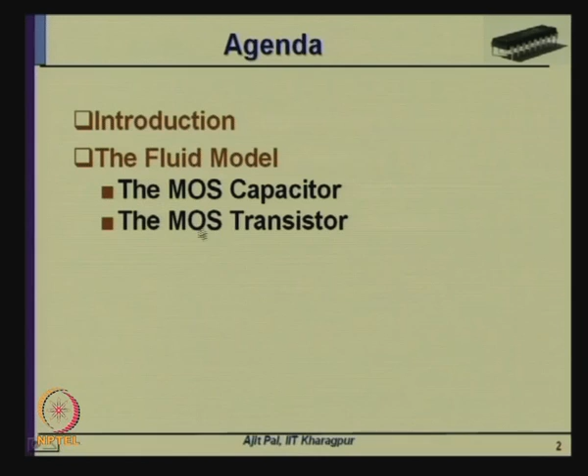Here is the agenda of today's lecture. First, I shall give a brief introduction about what I discussed in my previous lectures for continuity. Then I shall discuss the fluid model, which has been found very useful in understanding the operation of MOS transistors. As part of the fluid model, I shall consider the operation of a MOS capacitor, the most elementary building block of MOS transistors. Then I shall discuss the operation of MOS transistor based on the fluid model, and after that the characteristics of MOS transistor without going into any mathematical expression or analytical analysis, simply based on the fluid model. After that, the various modes of operation of MOS transistors will be discussed, followed by regions of operation—there will be 3 regions of operation of a MOS transistor—and finally, highlighting some important parameters which affect the operation of a MOS transistor.

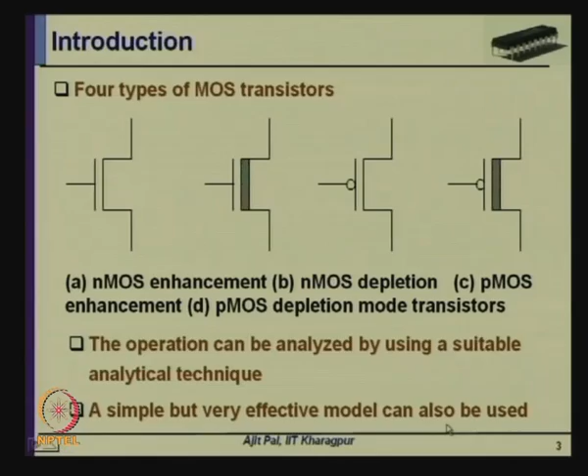This is somewhat similar to whenever we build a building, bridge, or campus—we make a model essentially to visualize the overall layout, structure, or basic functionalities of the system. This can be very nicely done with the help of a simple but effective fluid model, which can visualize the operation of charge control devices—devices like BBDs, bucket brigade devices, CCDs, charge coupled devices—and MOS transistors are one of them. MOS transistors are essentially charge control devices, and their operation can be nicely explained without going into detailed semiconductor physics with the help of this fluid model. You will see that the operation of MOS transistors can be understood even by a novice.

So what is this fluid model? This fluid model I shall be using is based on 2 very simple ideas. First, electrical charge is considered as fluid which can move from one place to another depending on the difference in their level, just like a fluid. As we know, whenever we have fluid in a container, and we connect it to another container, it will move from one to another depending on the difference in level. Similarly, charge will move from one place to another whenever there is a potential difference between the two. So electrical charge can be considered as fluid, and its behavior will be very similar to fluid—the way fluid like water, oil, and various types of fluid behave, as we see in our real world.

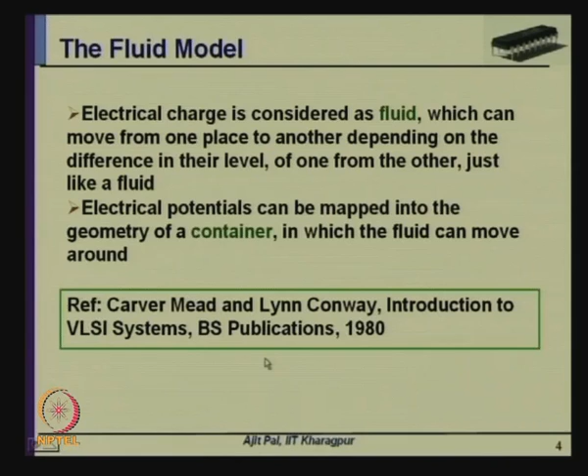Let me draw it for your convenience, a MOS capacitor. So, what we have seen when we fabricate MOS devices, we start with a wafer. This is the wafer, and then we fabricate - we put silicon dioxide on top of that. So this is the silicon dioxide, and on top of that we put polysilicon. We can represent it by a hatched area. This is the polysilicon, this is silicon dioxide, and this is your substrate, or you can say p-type substrate. It can be n-type as well, it does not matter.

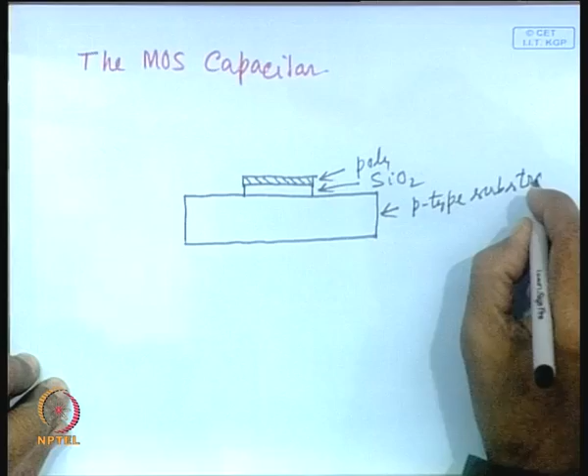So here we can consider this particular structure, which is nothing but a MOS capacitor. These two, polysilicon and the p-type substrate, represent two parallel plates. In a parallel plate capacitor, as we know, we have two plates, and in between the two plates we put some dielectric material. Here this dielectric material is silicon dioxide, which is an insulator.

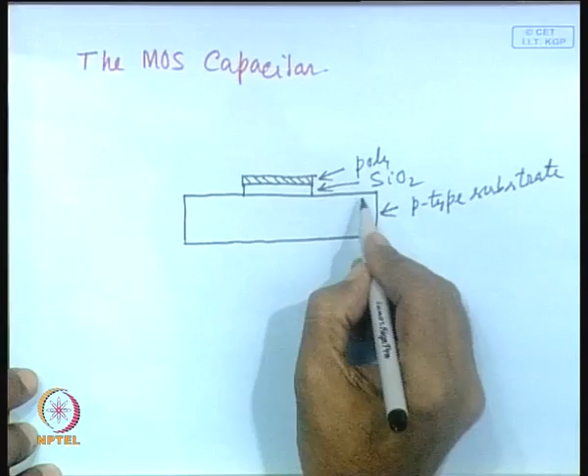So this is realizing a parallel plate capacitor, and normally, as you know, we apply some voltage across it. In this particular case we apply positive voltage to this polysilicon, because we have assumed that this is a p-type substrate. Normally in an NMOS transistor this is what we do. So this is positive and this is negative.

Now, based on this fluid model, as we apply some positive voltage, this can be mapped within the geometry of the MOS structure. First of all, whenever you apply a voltage, it will create some potential distribution in this substrate. So it will be somewhat like this - we can map it within this. So here it will be somewhat like this. This is the potential distribution, and we can say this is the interface potential.

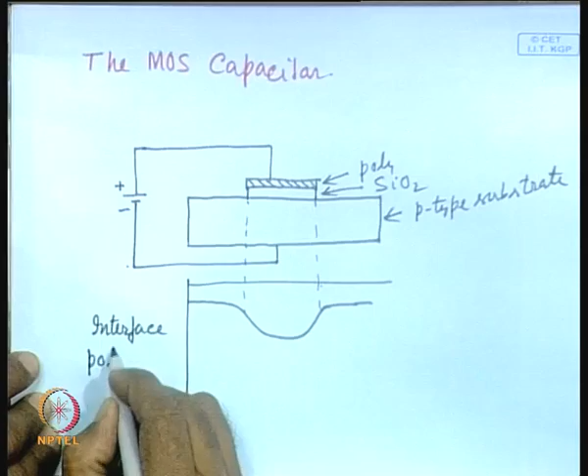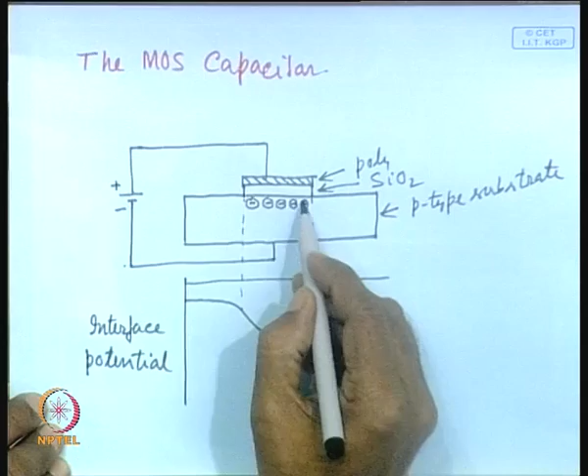And here, as you can see, this potential distribution has taken the shape of a container. This is the container where charge can be stored. How is charge stored? Whenever you apply a positive voltage, electrons are induced on this area, just on the opposite side of the insulator. That means on this plate, the positive voltage will induce charge, and that will be present in this area. We can say these negative charges can be stored in this parallel plate, in this container.

So here you have got charge - charge meaning, in this particular case, electrons. So here electrons are present, charge in the form of electron. You could have started with another type of capacitor where you apply negative voltage starting with an n-type substrate; in that case, this charge could have been holes. That is why I am writing charge and then mentioning electron. In this particular case it will be electron, because most of our discussion will be around NMOS transistors, and as and when necessary we shall discuss the PMOS transistor. So, in this particular case, this MOS capacitor will be inducing some charge in this area, and this charge will be present here.

Now, this charge, the amount of this charge, will be dependent on what? As you can see here, this charge will be dependent on two parameters. First of all, this particular area, how big is this area? Essentially capacitance C, capacitance value, this amount of charge that is being stored here will be proportional to C.

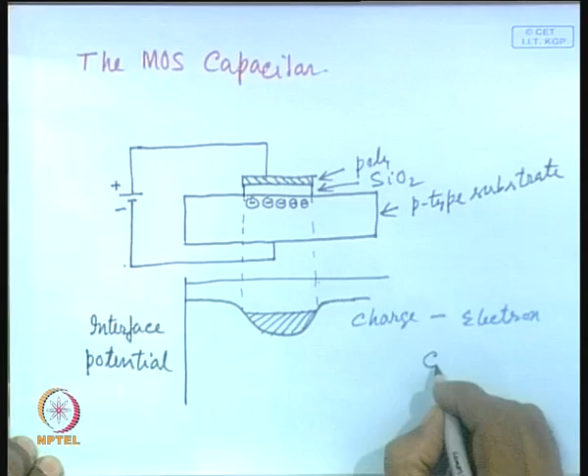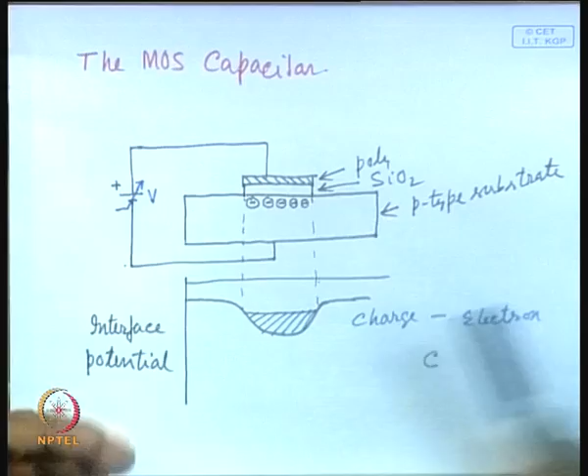And it will also depend on another parameter, that is your voltage, the voltage that you apply here. How will it vary? Suppose you keep on increasing the voltage, what will happen? This will actually push this electric field below. It will be somewhat like this. If you increase it further, it will be like this.

So that means the size of the container is increasing as we are increasing the voltage. That means more and more charge can now be stored. If the voltage is more, charge will be more, and the shape of the container is changing to store more and more charge. So as we know, Q is proportional to C and V. This is very clearly visualized with the help of this model.

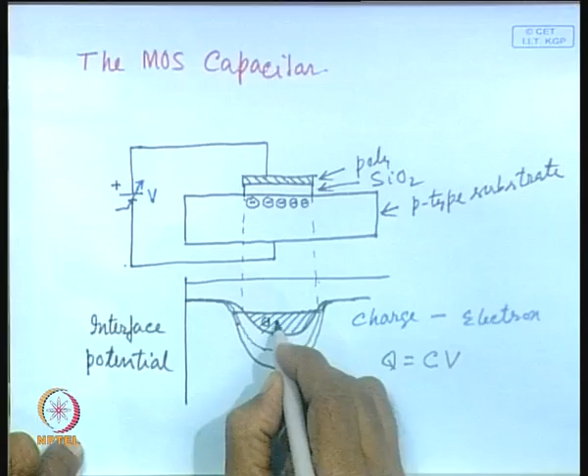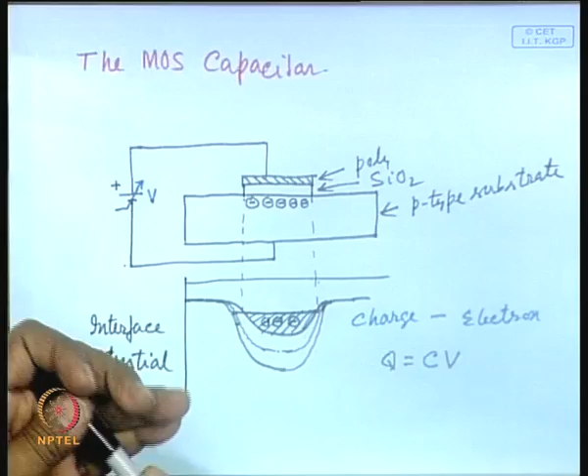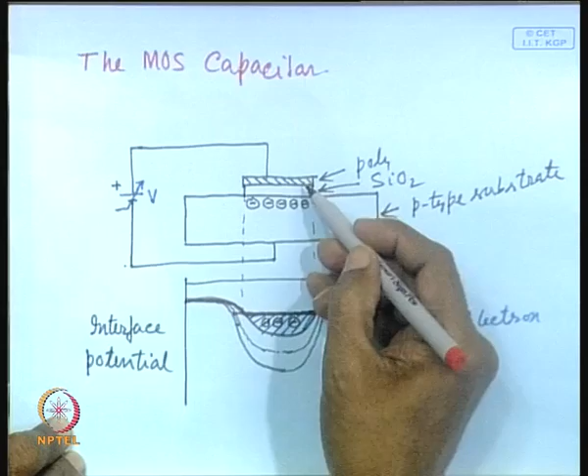Now, after these charges, though these are essentially electrons, what will happen? These electrons will actually neutralize some of the potential, and as a result, in the equilibrium condition, the potential distribution will be somewhat like this. This red line is the potential distribution in equilibrium, because these electrons, being of opposite charge, will neutralize the influence of the positive voltage applied on the other side.

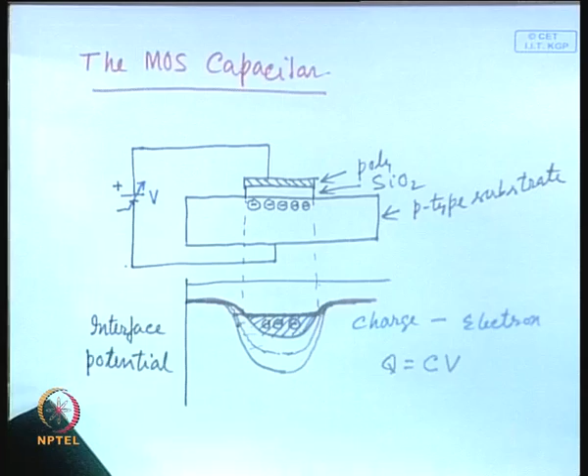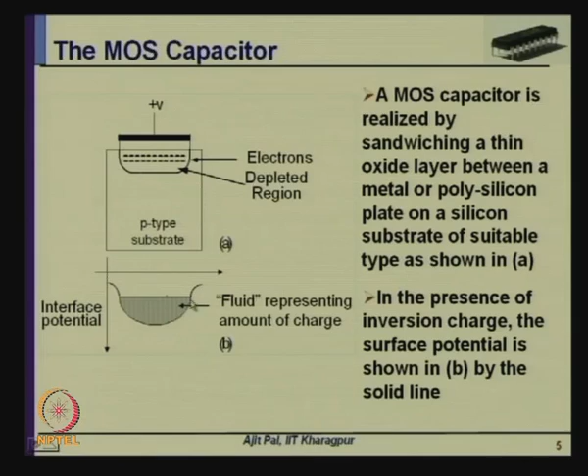So you can see in the equilibrium condition, these are all filled up with electrons, so the potential will be somewhat like this. So this is how we can explain the operation of a MOS capacitor, and as mentioned here, this fluid represents the amount of charge in the presence of inversion charge, the surface potential shown in B. So this is the line shown in this diagram.

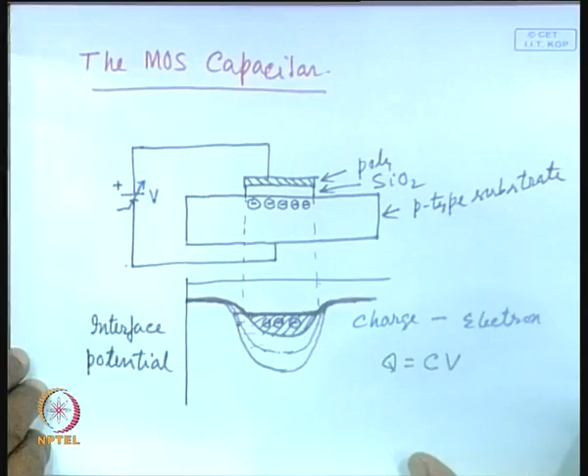So this is the inversion charge. Originally, as I mentioned, this was a p-type substrate, there were holes present here, but this voltage applied to the other side of the plate has induced electrons, which are known as inversion charge. So this is how the operation of a MOS capacitor can be explained with the help of the fluid model.

Now let us consider the function of a MOS transistor. We can extend the basic concept of the MOS capacitor to the MOS transistor. What is the difference between a MOS capacitor and a MOS transistor? As you can see, the central portion is essentially the MOS capacitor, and on both sides we have got drain and source. So we can draw it starting from the MOS capacitor.

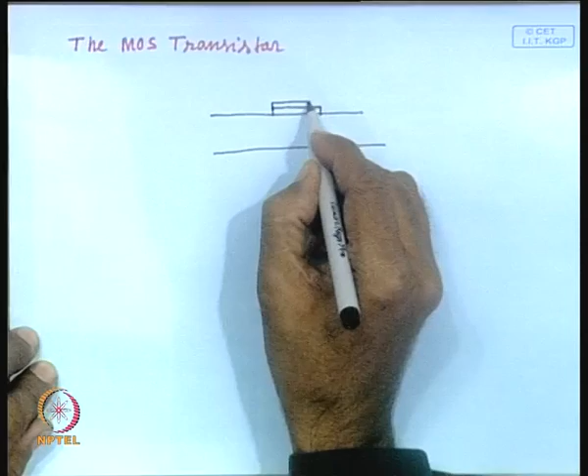So here the MOS transistor. We can start with the same thing: this is the substrate, and here you have got silicon dioxide, on top of that you have the polysilicon, and on both sides of it you will be having source and drain. So this is the p-type substrate, then this is n-plus and this is n-plus. So this will form the source and this will form the drain.

So I am assuming I am taking electrical connections, so I have put metal on top of this source and drain. So this is the structure of a very simple MOS transistor, an NMOS transistor. Now, in this particular case, what will be the corresponding interface potential? Let us see.

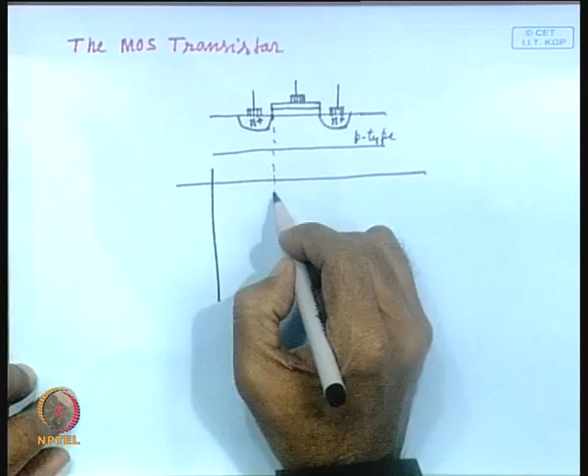So this is the gate, this is the source, this is the drain, let us assume. Now, in this particular case, as you can see, this part is essentially the capacitor part. So here you have got the polysilicon, on top of that metal has been deposited, and this is the silicon dioxide layer. What will be the interface potential here? So here also you will be having interface potential.

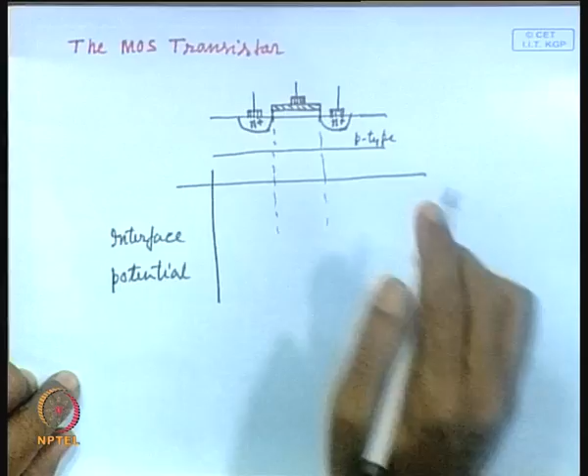To start with, let us assume that you have applied some voltage, the voltage being applied to the gate and the drain. Both source and drain are at the same potential, meaning these two are joined, and you can apply some positive voltage to the gate.

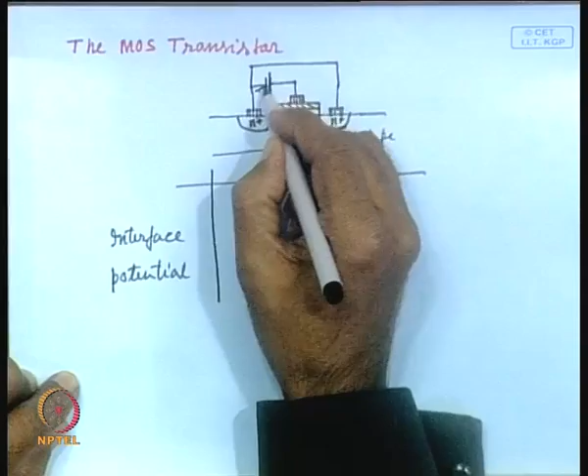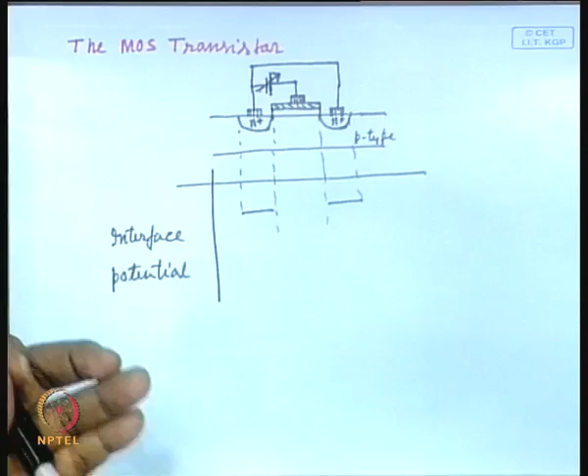So, this is the model that we will be using. Whenever this voltage is 0 and the source and drain are at the same potential, what will happen? We can say that these two are having an infinite source of electrons, since the source and drain are very heavily doped, they are considered as an infinite source of electrons. How do you really represent an infinite source of electrons?

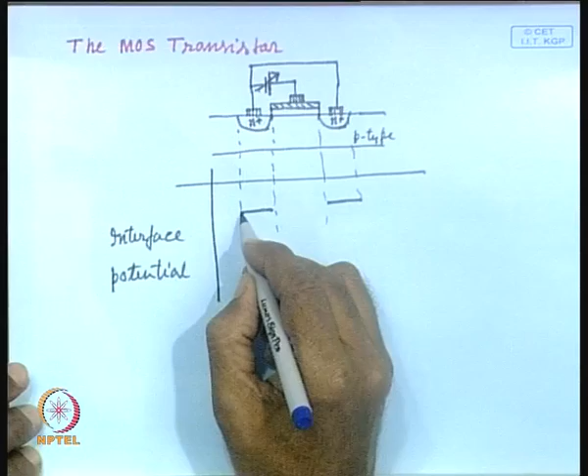We can consider them as n wells of infinite depth, and on both sides you have got n wells of infinite depth, and since their potentials are tied together, the potentials are the same. Now, what about the middle portion? What will happen to the middle portion?

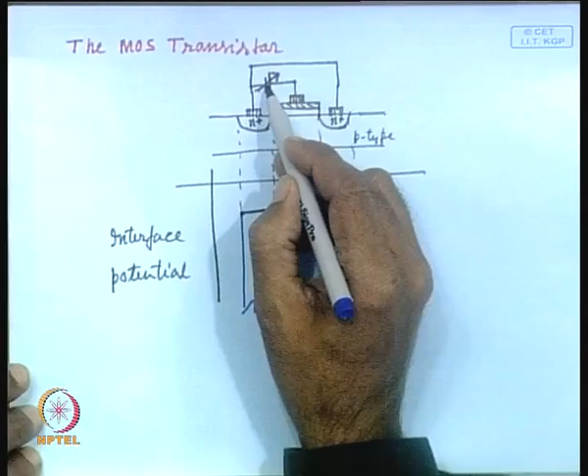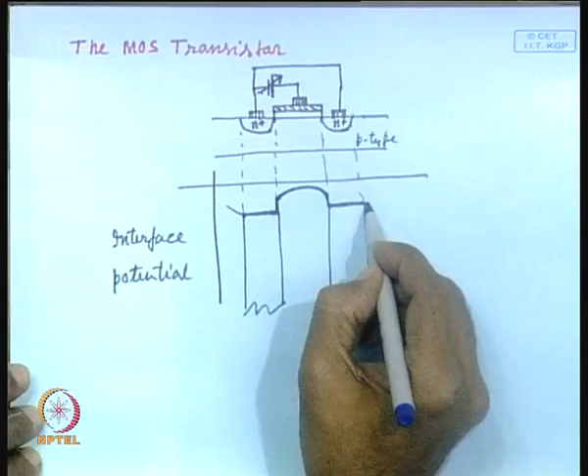In the middle portion, whenever this voltage is 0, obviously there is no electron present here, and the potential will be somewhere here. So, you can see the potential distribution in the gate region is somewhat like this, it will be somewhat like this.

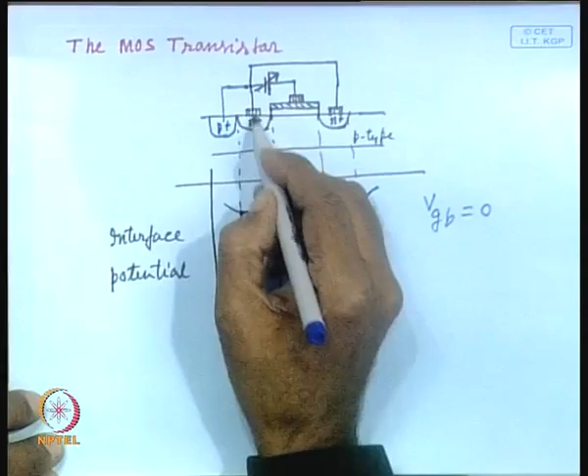In this particular condition, say this is figure number 1, this corresponds to V_GB equal to 0. That means the gate voltage with respect to the source, and as you know the source is connected to body using a P plus contact. Since source is connected to body, V_GB is equal to 0, and under this case we have a barrier.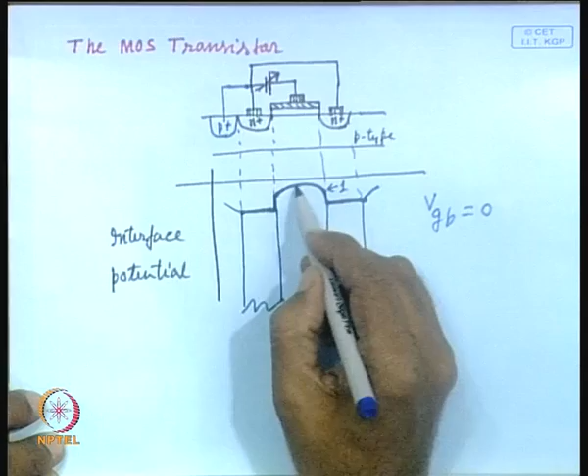So we have a potential distribution here. That means here you have got an infinite source of electrons, and here too, as if we have two containers of infinite depth, with lots of electrons present in both. But since the potential is above this level, these two are separated by this particular barrier. So although the source and drain have infinite sources of electrons, they are not connected, and no charge can move from one to the other.

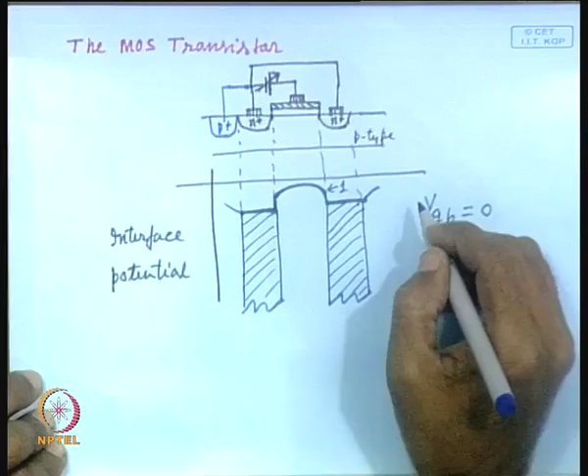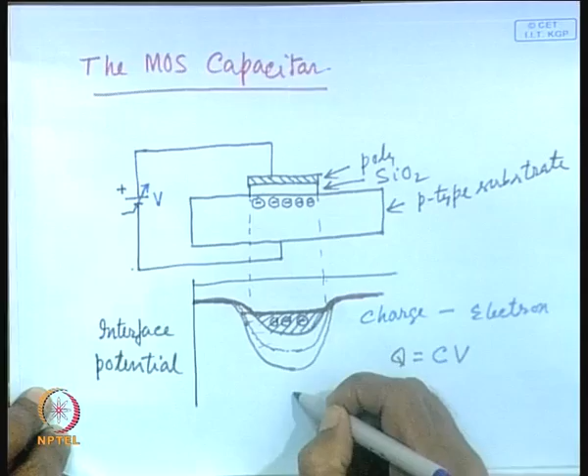Now let us assume we keep on increasing the gate voltage. As you increase the gate voltage, what will happen? This interface potential is pushed down. So here also this will be pushed down, say this corresponds to 2, this corresponds to 3.

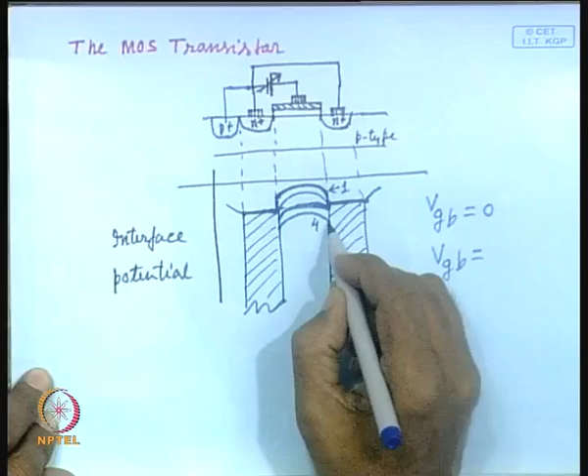Now, what is happening whenever it is 3? Situation 3 is where these two are almost touching, and if it is a little more than that, then these two will be connected. This 1, 2, 3, and 4 — potential 4, corresponding to a little higher gate voltage, will correspond to a situation when these two will be connected to each other.

But since their potentials are at the same level, there will be no flow of charge. That means, whenever the gate, drain voltage and source voltage are the same, although they are connected by a path — as we know that path is the channel — there will be no flow of current, because their potentials are at the same level. So since they are at the same potential, no flow of current will take place.

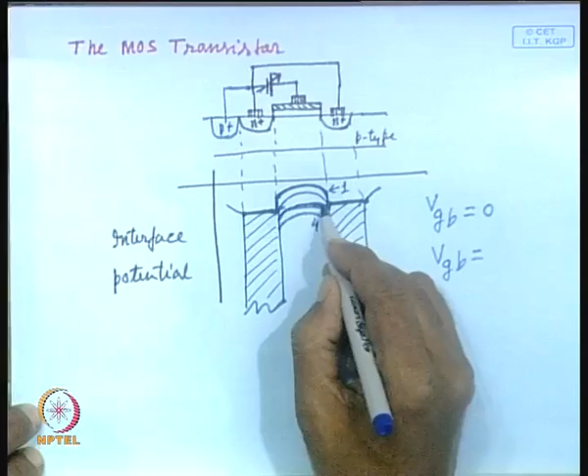But the position where, for a particular case when this is 0 and these two are almost touching — what voltage do we assign to it? We call it threshold voltage, V_T. That means a voltage which, when we apply to the gate, creates a channel, creates a conducting path between the source and drain. So that is the minimum voltage required to connect the source and drain.

In other words, that will create the formation of the inversion layer. So electrons are present here, and they are connected to each other. So the surface potential will be somewhat like this now. In equilibrium it will be like this, so that means it will be like this.

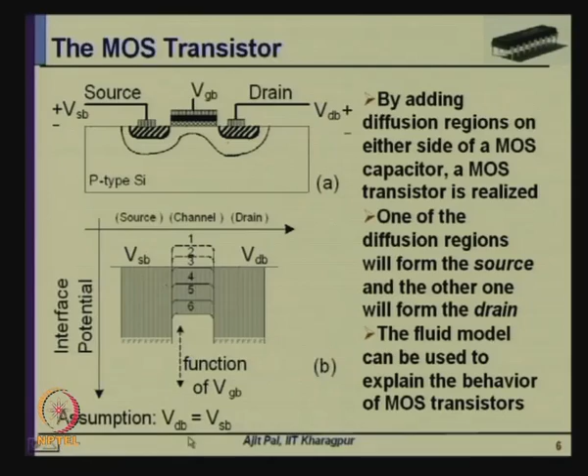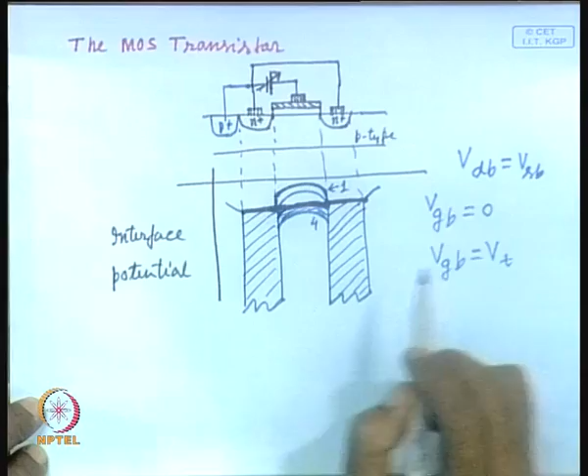This is the situation where we are assuming the drain voltage is the same as the source voltage, and we are varying the gate voltage. As we have seen, at some point these two are connected to each other, but no charge will flow because they are at the same potential.

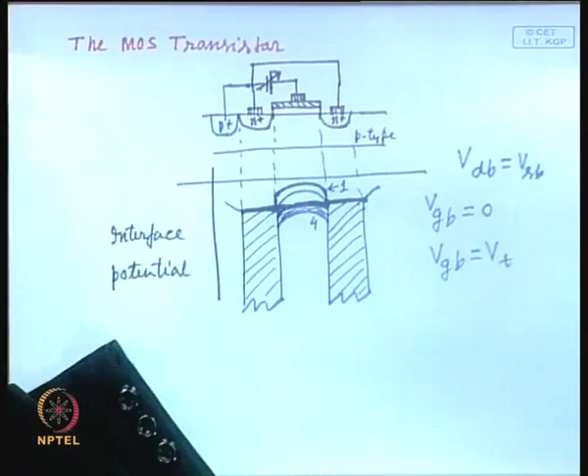Now let us go to the second situation. What is the second situation? We shall apply some higher voltage to the drain with respect to the source, and apply some voltage above the threshold voltage at the gate. So these two, and then we shall vary the drain voltage and see what happens in this situation. Let me redraw these figures to explain that — again it will be the MOS transistor operation.

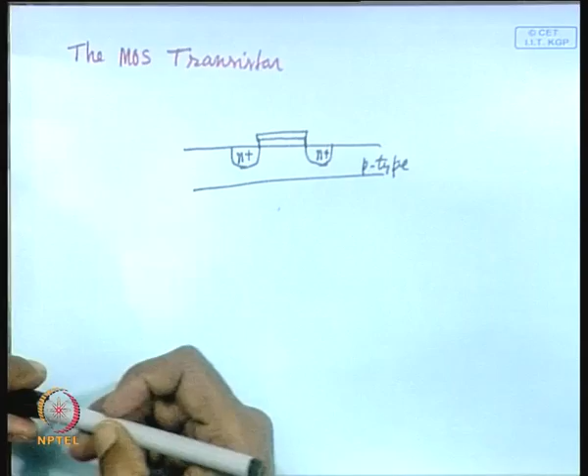In this particular case, again we use the same structure: the substrate, the MOS capacitor with silicon dioxide, polysilicon, then source and drain. You have N plus regions, and this is P type substrate since we are considering an NMOS transistor. Here we have put some metal for taking connections, also some metal for taking connections, and here also some metal. As I have already told, this is P plus, so this is connected, source is connected to it.

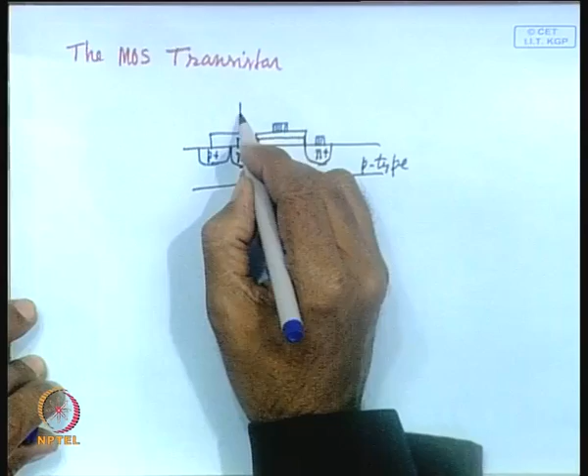Now, with respect to this source, we shall apply some positive voltage to the gate, that means VGB is greater than VT, where VT is the voltage at which the channel is created. What about this voltage? We shall apply a variable voltage - this is positive, this is negative, this is positive, this is negative here, and this we shall be varying.

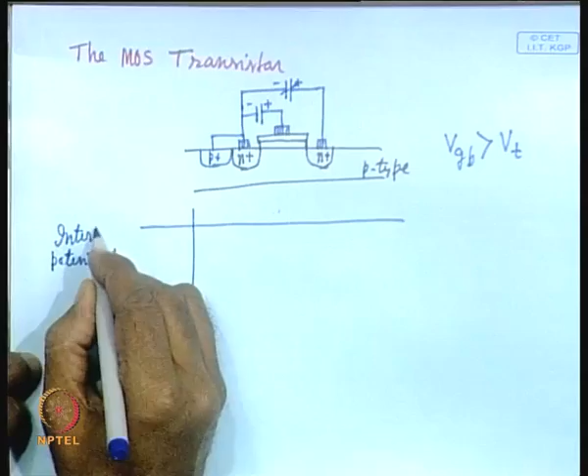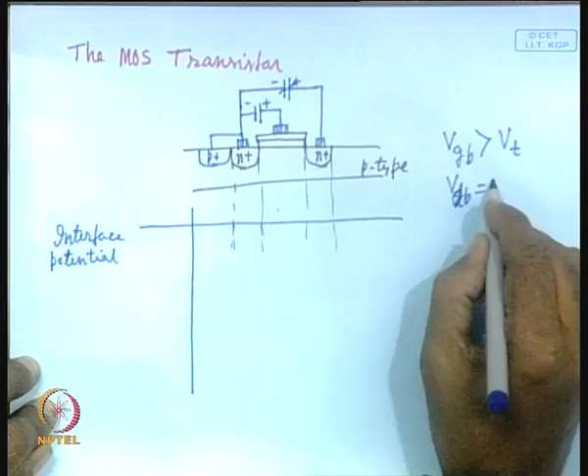So in this condition, what will be the situation and the potential at the interface, and how will the device behave? Let us see. Here also you have got potential distribution, the interface potential you can say. Again we shall be having two wells, but in this particular case initially let us assume these two voltages are 0, that means the initial condition is VGB, VDB equal to VSB equal to 0. So with respect to the body, 0 voltage is applied to the source and drain, and let us assume these are the potentials to start with.

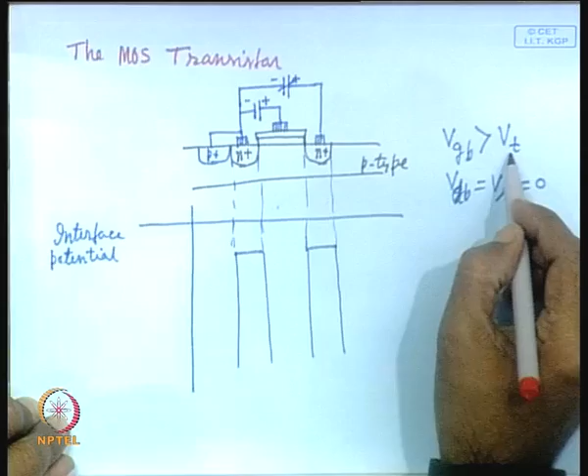As usual, these are the infinite wells. Now, what we do is apply a gate voltage which is more than the threshold voltage, so the gate voltage is somewhere here.

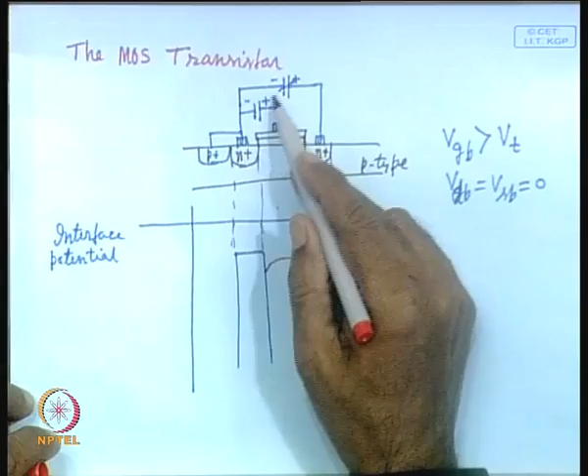Now let us consider the situation when we shall be pushing and increasing this drain voltage. The drain voltage is gradually increased, and initially this is condition A, where the drain voltage is the same as the source voltage.

Now what we do is simply apply VDB equal to VSB plus delta, a little more. As we increase it, what will happen? In this particular case, the charge distribution, the potential distribution, was like this.

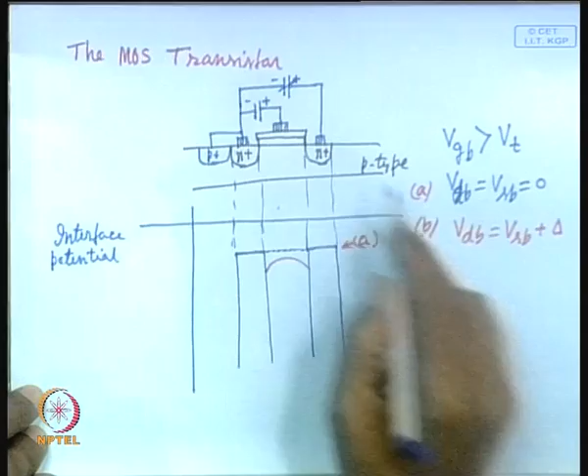Now, as this drain voltage is increased with respect to source, it will be pushed downward. So as it is pushed downward, it will come here. Then what will be the potential distribution in the equilibrium condition? It will be like this.

And we increase it further, say condition 3 is VDB greater than, significantly greater than, VSB. What will happen in this case? Say it has reached this point.

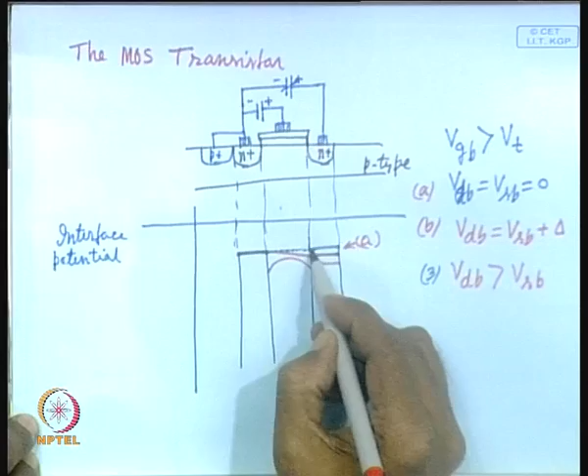Another point I should tell - whenever the drain voltage is made a little higher than the source voltage, and when the gate voltage is more than the threshold voltage, as you can see here there is a slope. Earlier it was horizontal, now you have got a slope. What does this slope represent? Current - that means the rate of flow of charge is indicated by this slope, and the amount of current that will flow is dependent on this slope. The slope is not very high, so current will flow.

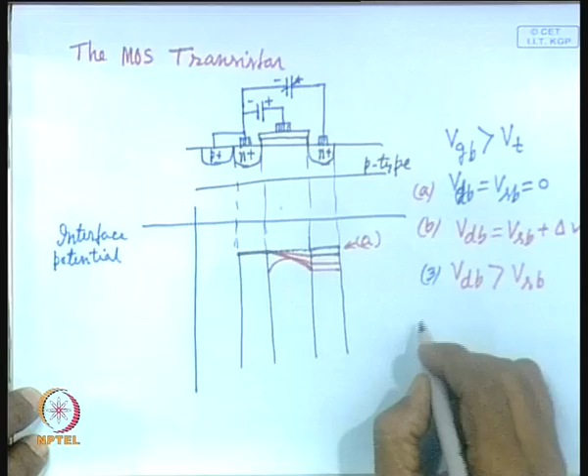So in this particular condition current will start flowing, and as we increase it further, this slope will increase. Now we have reached this point, the slope is reaching its maximum point, and whenever it is condition 4, VDB is greater than VGB plus Vt, then what will happen? This will be the case whenever it reaches here. So this is the condition where VDB is equal to VGB plus Vt.

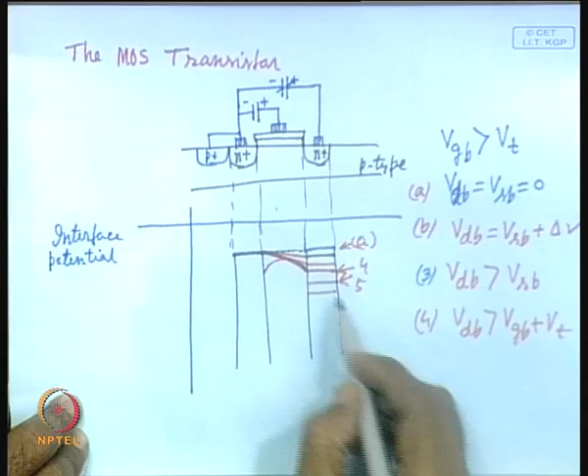So at this point - this is condition 4, and this is condition 5. At this point, if you go further down, you can see the slope is maximum. If it is pushed further, there will be no change in slope, because it has reached the maximum point. So there will be no further change in slope even if you push it beyond this. That means if the drain voltage is increased beyond this value, there will be no change in slope, and as a consequence, no further increase in current.

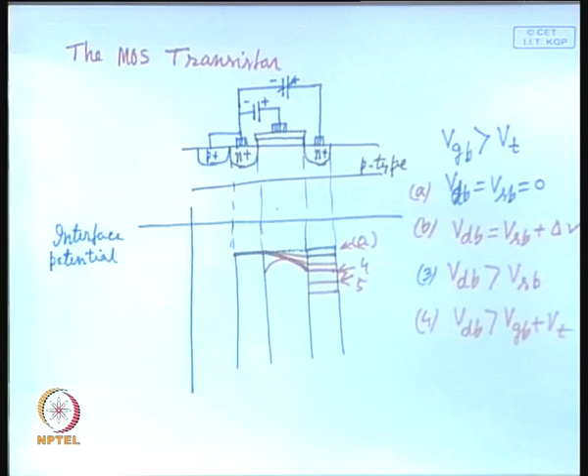So we have seen how actually current flow occurs in a MOS transistor. Can we now construct the characteristics of a MOS transistor based on this model? Let us see whether we can do it or not.

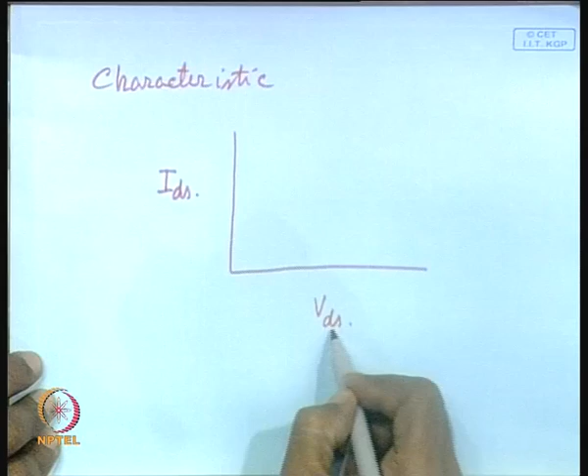Characteristic. So what I shall do on this, we shall put on this side, we are interested in drain current IDS. On this we shall put VDS. So we shall analyze the increase in drain current as we increase the drain voltage with respect to source, or it can be body. If source is connected to body, VDS is same as VDB, and for different gate voltages.

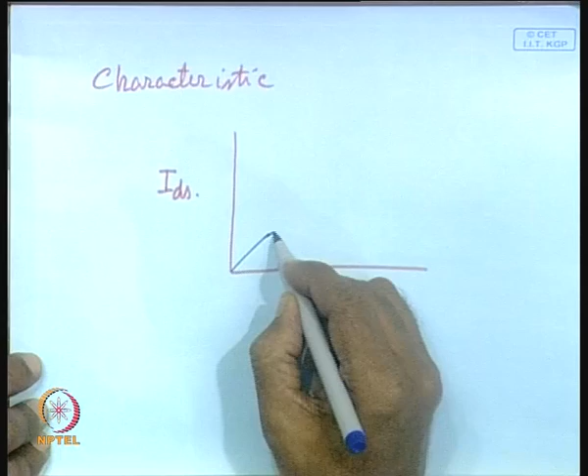So for a particular gate voltage, as we have seen, initially the current increases, and as it reaches the point which is equal to VGB plus VT, then it remains constant for that particular gate voltage.

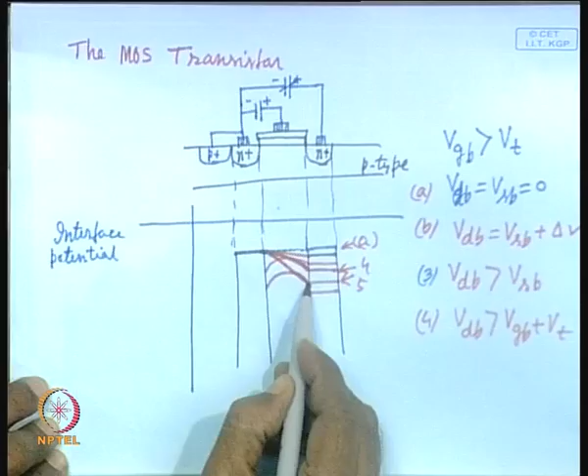Now, if the gate voltage is more in this particular diagram, what we could have done is apply a higher gate voltage here. So in that case, if we apply higher gate voltage, the barrier will be lower. So the maximum current that can flow will be more, because the slope will be like this. So more current can flow as the gate voltage is more. That means whenever you apply a higher gate voltage, the curve will be somewhat like this.

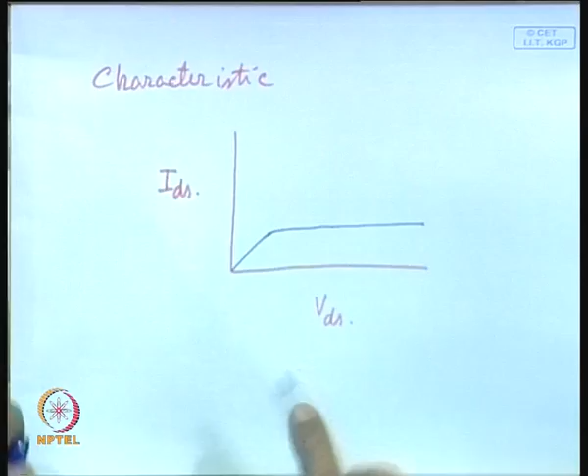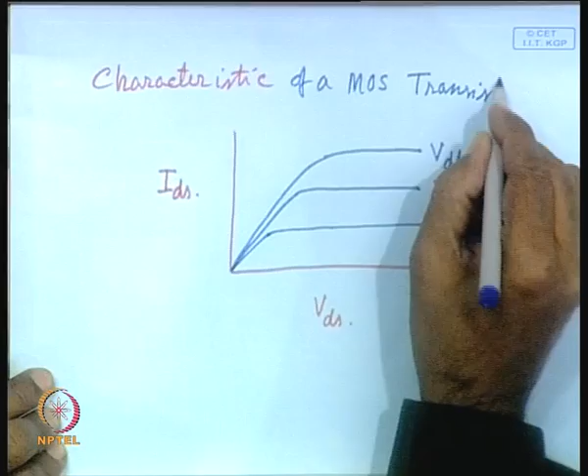So this is for a particular gate voltage, say this is VGB1, this is VGB2, and you can increase it further, and you will get a curve like this, VGB3. So we can see we have been able to draw the characteristic of a MOS transistor without deriving any mathematical expression. Simply based on the fluid model, we have been able to express the operation of a MOS transistor and how current can flow in it, and later on we shall see how it actually happens.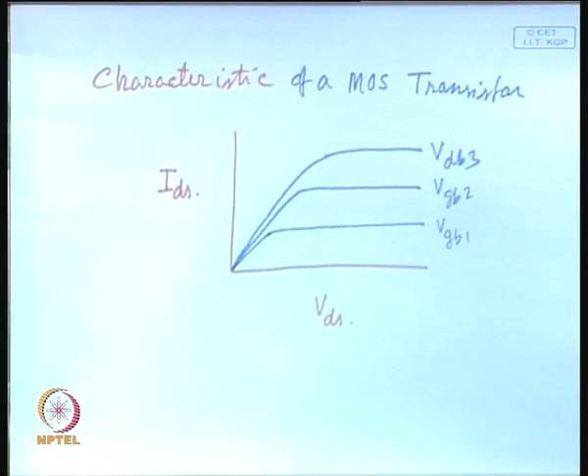Okay, I mean derive a mathematical expression for this. Another plot is here, showing the dependence of current on the gate voltage. So we have seen here, this current is increasing as you are changing the gate voltage, this is GB1, GB2, GB3. As we increase the gate voltage, the current is increasing.

Of course, this VGB1 has to be greater than VT, all the voltages have to be greater than VT. That is what is being shown here. That means this curve shows that starting with VT, as we increase the gate voltage, these are essentially representing the saturation currents, and we can control the current with the help of this gate voltage.

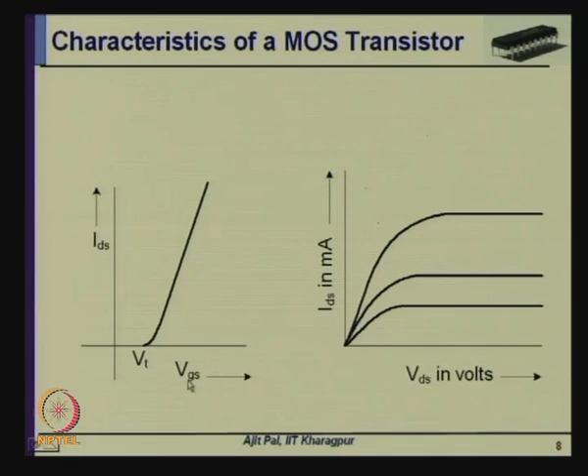So what have we learnt from this fluid model? From this fluid model, we have learned that the MOS transistor can be considered as a voltage controlled device, and as we have seen, the drain current is dependent on two electrical parameters: gate voltage and drain voltage with respect to source or body. So by controlling the gate voltage and drain voltage, we can control the flow of current in the channel, and that is how a MOS transistor works. So this is as simple as this.

So after discussing the characteristics of MOS transistors, now we shall focus on another very important aspect: modes of operation of MOS transistors. We have already explained the operation of a MOS transistor using the fluid model, and we have seen how and when current flow takes place and how the current increases and so on. Based on that, the operation of a MOS transistor can be divided into three modes.

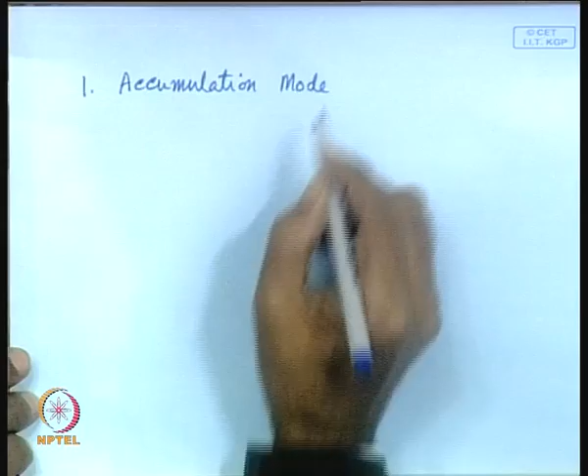First one is known as accumulation mode. Number one is accumulation mode. What happens in this mode, what is it represented by? When the gate voltage VGS is less than VT. What do you really mean by accumulation mode?

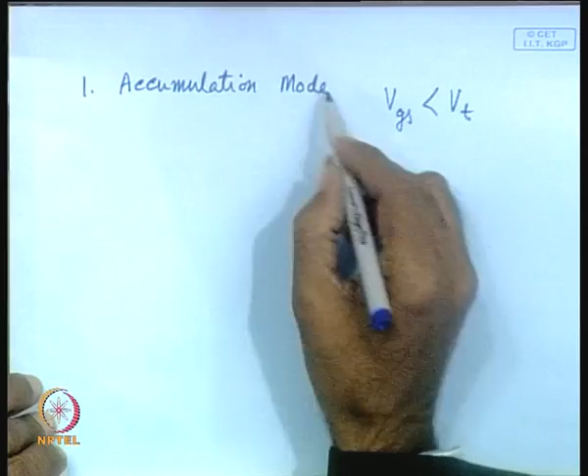For example, in this case we shall reach depletion mode. Depletion mode is reached.

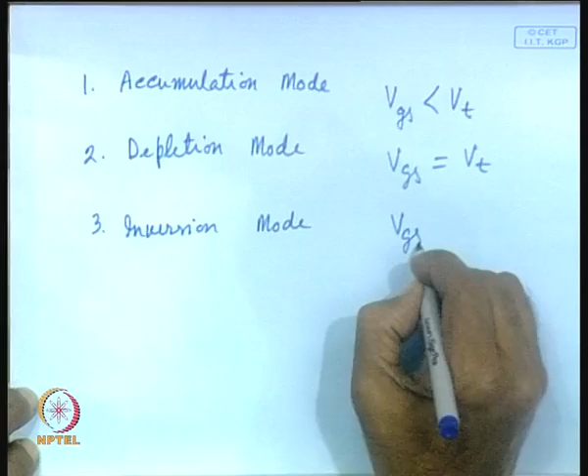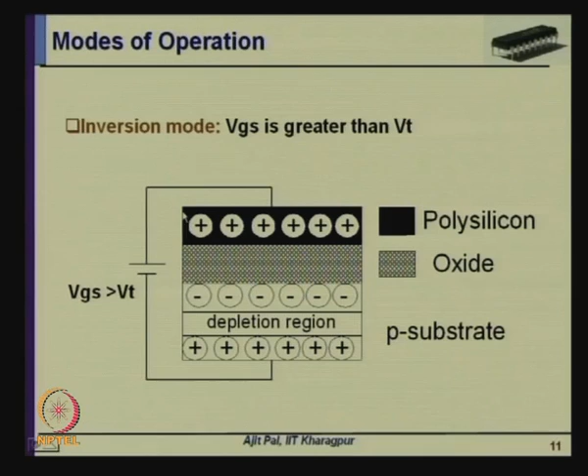So inversion mode is when VGS is greater than VT. When the gate voltage is more than the threshold voltage, the device moves to inversion mode, and in this inversion mode we have got electrons present, and as we know these electrons will be attracted towards the drain if we apply a positive voltage to it, and current flow will start. So for flow of current, this inversion mode is necessary, and before that, when the device is in depletion mode or in accumulation mode, no current flow can take place.

And another operation we shall see, regions of operation. We have already discussed the characteristics of a MOS transistor. Now the operation can be broadly divided into three parts, three regions of operation. What are the three regions of operation?

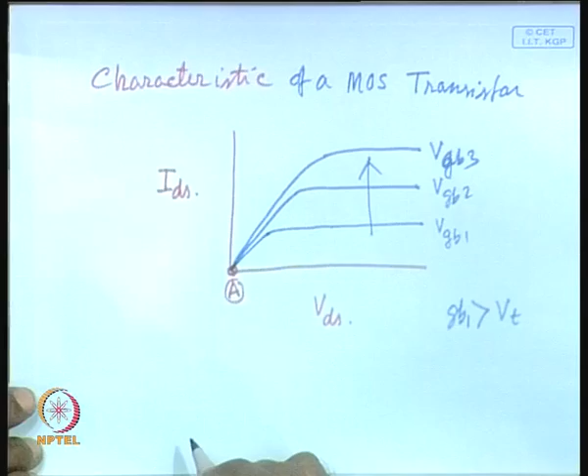First of all, first region is cutoff region. Cutoff region is accumulation or depletion mode, when no current flows between the source and drain, as I have already explained. So in the cutoff region of the characteristic, no current flows, that means this is represented by this point A. This corresponds to the cutoff region, meaning no current is flowing, no drain current is flowing. So this is the point which represents the cutoff region.

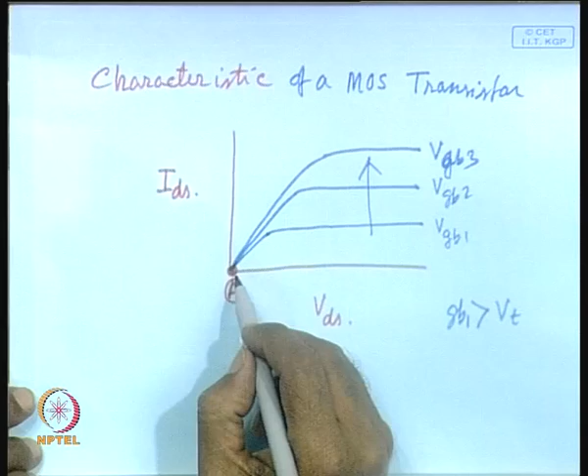Then we have got the second situation which is known as the non-saturated region. Non-saturated region, also known as weak inversion mode, is when the drain current is dependent on the gate and drain voltage. It is known by several names: linear region, weak inversion region, non-saturated region, these are essentially the same. And in this particular curve,

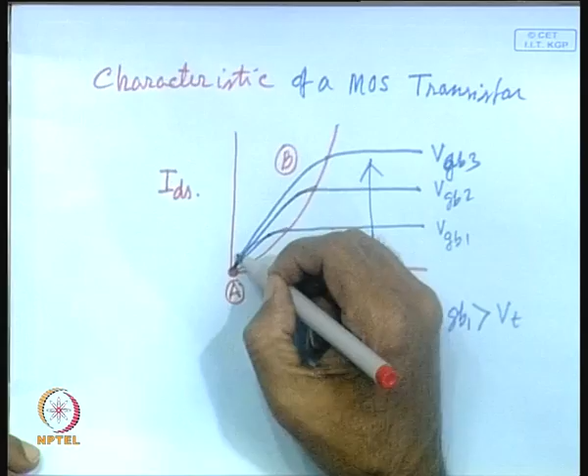this part is essentially B. So this is your non-saturated region, also known as linear region, because current is linearly, almost linearly increasing, as you can see. That is why it is also known as linear region. So this is the second region where current can flow, but current is dependent on the gate voltage, as you can see, and also on the drain voltage.

So for example, at this point, for the same drain voltage, for three different gate voltages, there are three different currents. Similarly, for different drain voltages, you can see for the same gate voltage, the drain current is changing. That means the drain current is dependent on two electrical parameters, gate voltage and drain voltage, and in this region it varies for both. That means if drain voltage is changed, current will change; if gate voltage is changed, current will change.

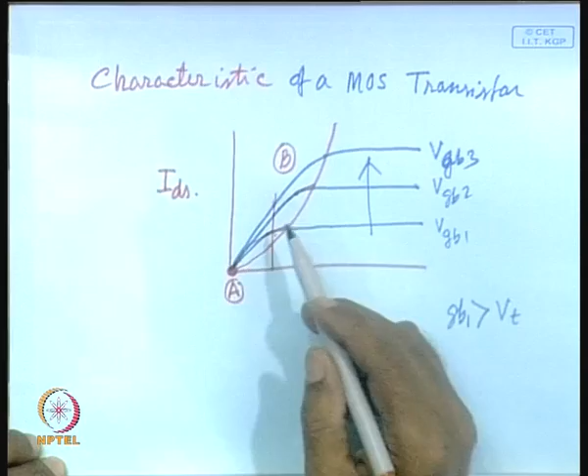Now, what happens in the third region, the saturated region? This saturated region is known as strong inversion mode. You have applied a voltage which is equal to VGB minus VT. So when you have applied a gate drain voltage equal to VGB minus VT, no further increase in current takes place, as we have already seen. So this is represented by strong inversion mode, or saturated region. Here you can see current does not change as we increase the drain voltage. Here also current does not change as we increase the drain voltage.

Current is not changing as we increase the drain voltage; however, it depends on the gate voltage. So in the saturated region, the current depends only on the gate voltage. On the other hand, in the linear region, current is dependent on both drain voltage and gate voltage.

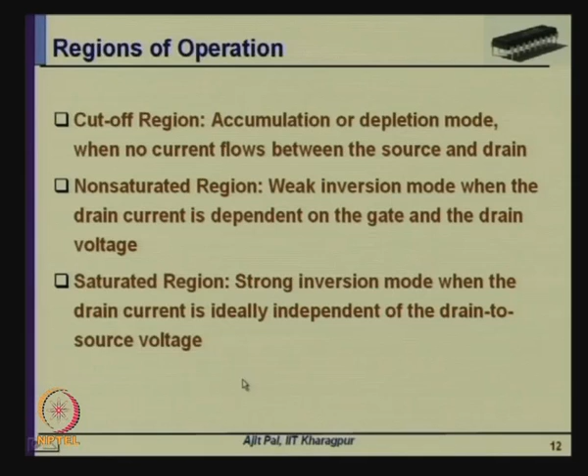So we have seen the operation of these three different regions, again without any mathematical expression. In the next lecture we shall derive the mathematical expression, but before we go to that, let us have a look at various parameters on which the drain current is dependent.

Apart from drain to source voltage and gate voltage, it depends on the distance between source and drain, L, because electrons move from source to drain, and depending on the velocity, it will take some time. The rate at which it will go depends on the distance - electrons have to traverse that distance at a particular speed, and the shorter the distance, the more electrons will flow and the current will be more.

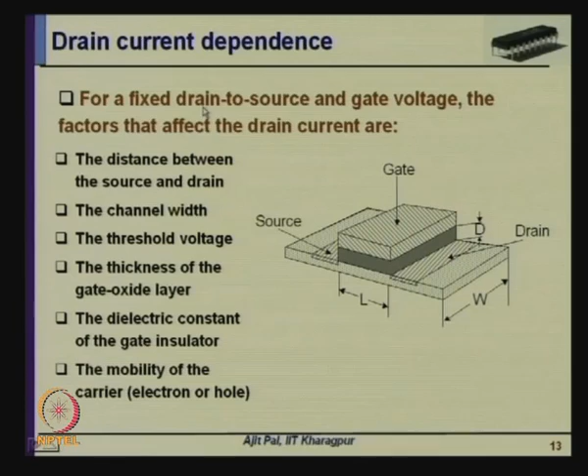So these are the parameters on which the drain current will depend, apart from the drain and gate voltage. In my next lecture, I shall derive the analytical expression of this drain current in terms of these parameters.